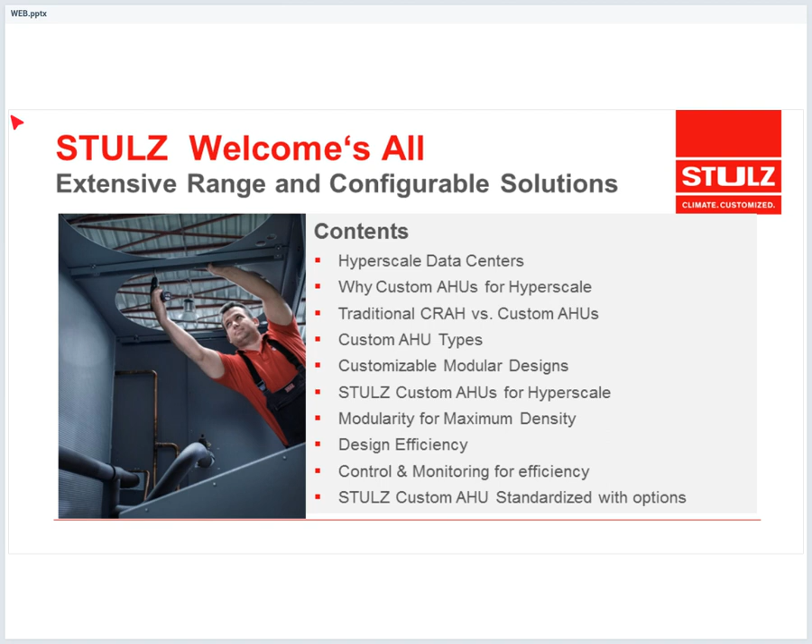So why hyperscale? What are the influencing factors? Because the demands are growing faster and faster, and the amount of data being provided and produced is growing in a hyperscale way. The requirements for reliability, flexibility, uptime, efficiency, and at the end, cost and available spaces are drivers for new ideas.

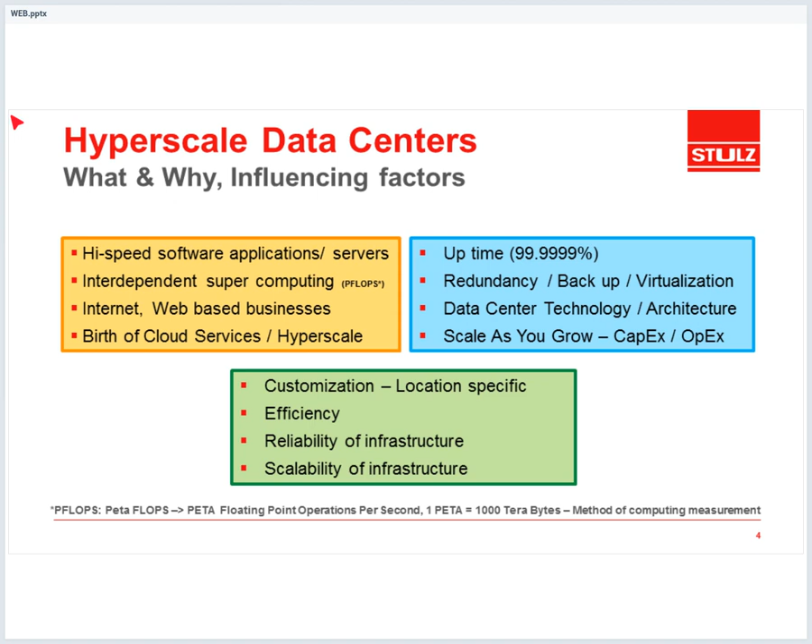In order to meet all these new requirements, it becomes instantly more difficult to find something off the shelf.

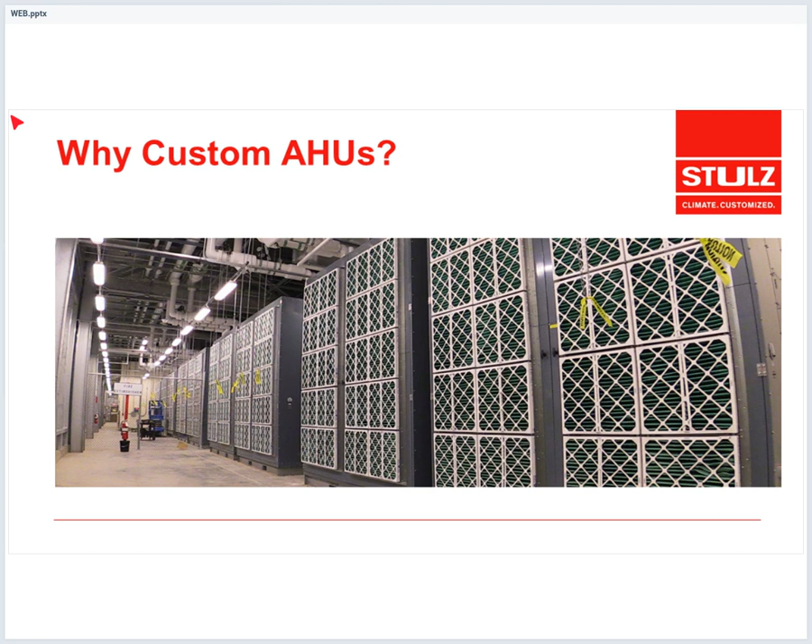Why custom solutions are needed and also makes a lot of sense.

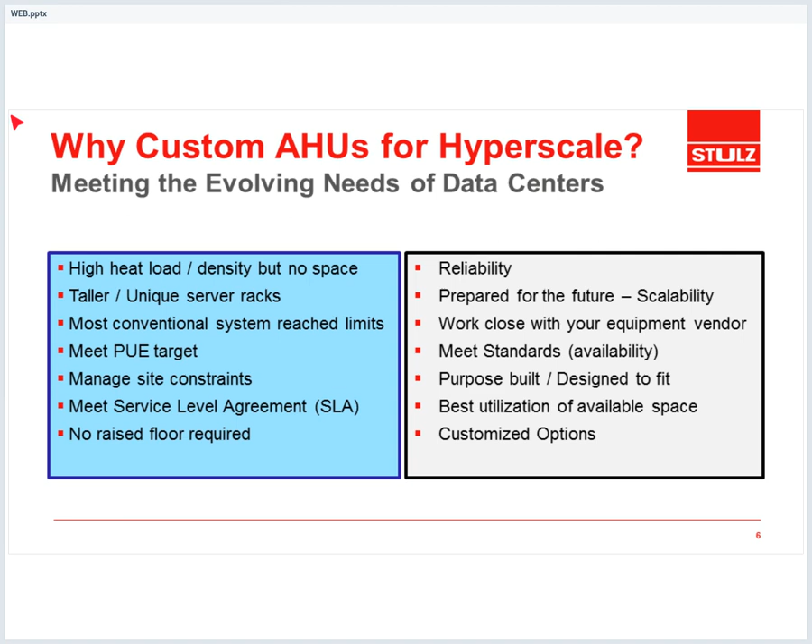So this illustration actually shows you how such a design, let's say using custom indoor air handling units with horizontal airflow pattern in a data center.

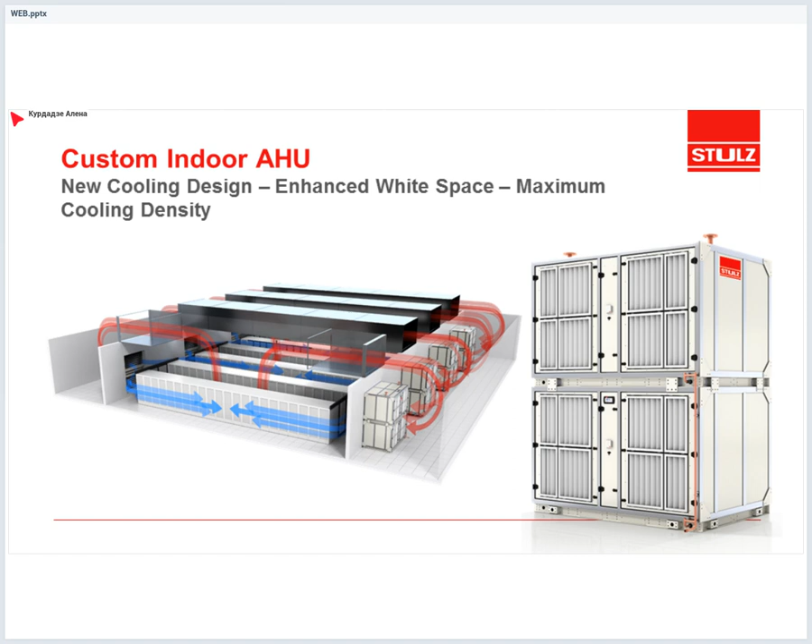With the new system of custom indoor AHUs, there is a new parameter born. So we call it cooling capacity per linear foot or meter.

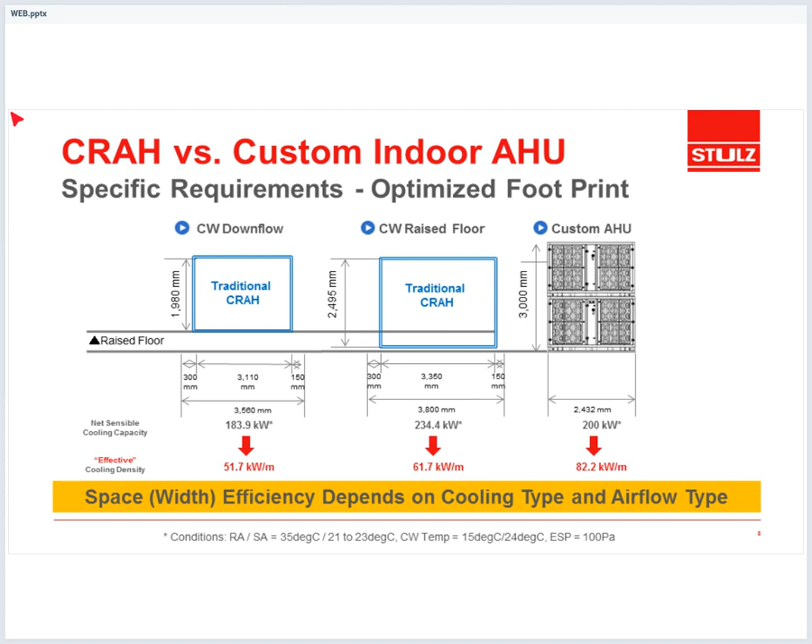So what is the impact on cost from CapEx as well as OpEx point of view?

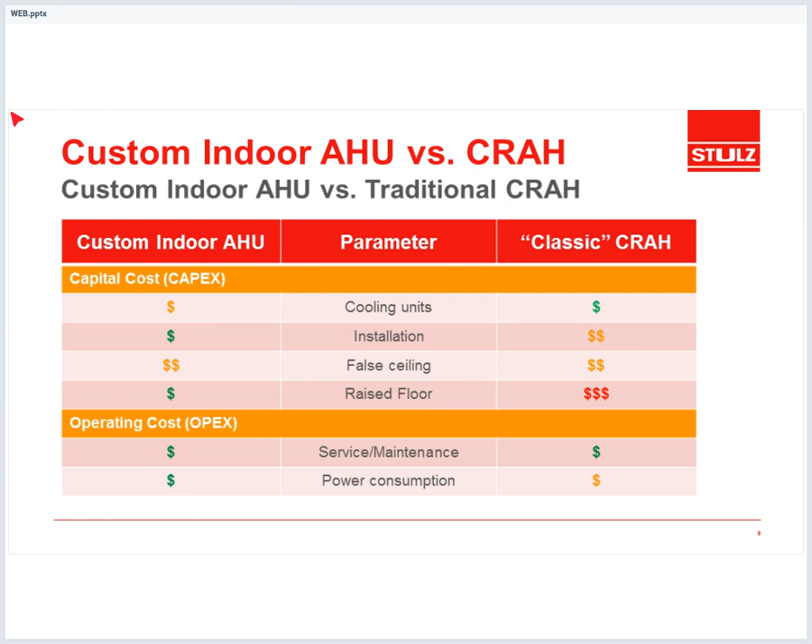So custom designs in general can be available in many different cooling configurations and shapes, from a simple chilled water over DX or combinations with free cooling or adiabatic, indirect adiabatic. Many different configurations are possible.

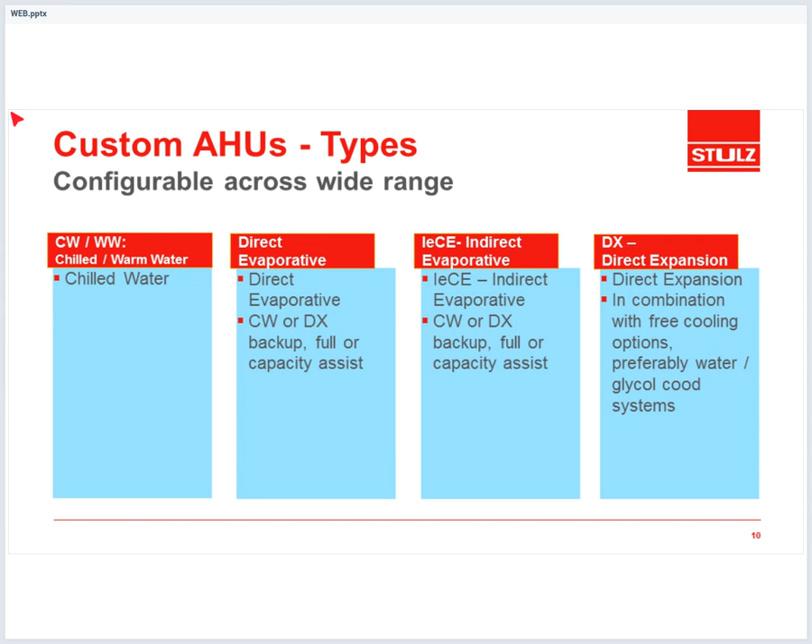So I have recognized over the last years, since I'm working with so many different clients and so many different projects, that each data center design is somehow unique. The building blocks can vary as per the user specifications and requirements for operation conditions, ambient and space. So it becomes at the end of the day a user-driven, a custom designed and a purpose built cooling solution if the best possible is wanted. We can offer today a significant range of field-proven design concepts and products with horizontal airflow patterns. From a stackable fan coil unit to a big AHU, nothing is left out.

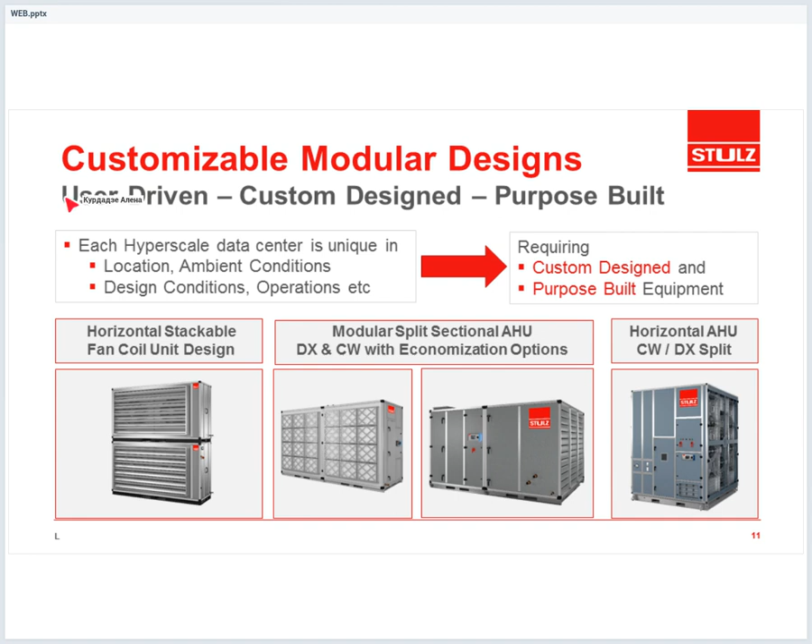So is there a way to standardize a custom solution?

Yes, maybe there is. When standardizing the entire data center design, this principle applies too. A standardized cooling solution has cost advantages and is generally available more quickly. In particular for smaller data centers, the use of a standard unit is probably the better choice.

What you see here is our standardized stackable fan wall design in building blocks of nominal 200 kilowatt and 400 kilowatt units or modules. We have 100% rear side access. It's easily deployable due to lifting provisions for fork and crane lifting.

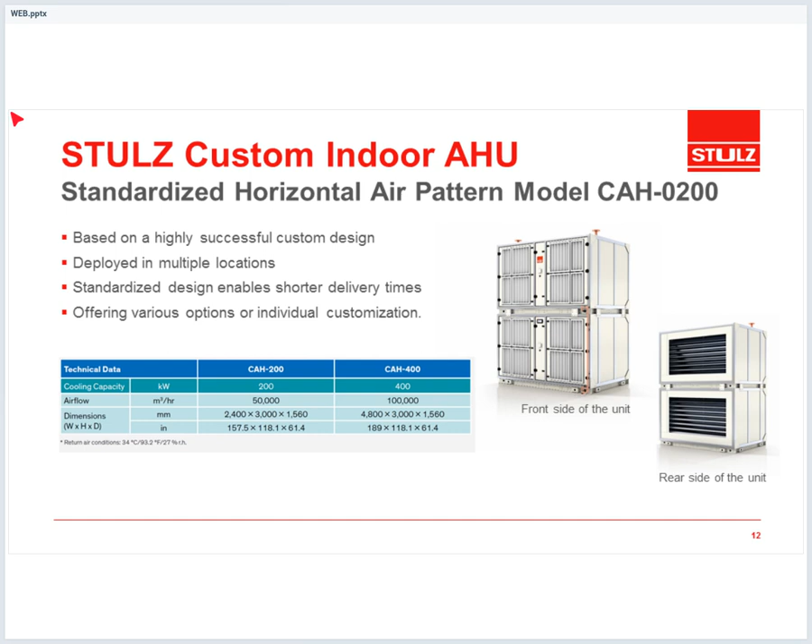Having this kind of design concept helps us, as we see on the next slide, to create a kind of cooling wall. So we have the possibility to install the units on site in the service corridor side by side, creating a wall of cooling and using the optimum out of the available space.

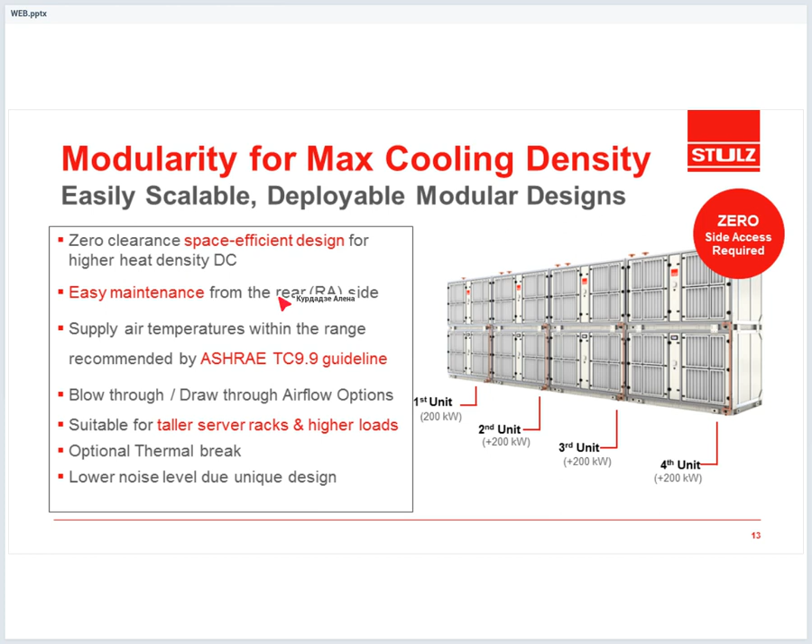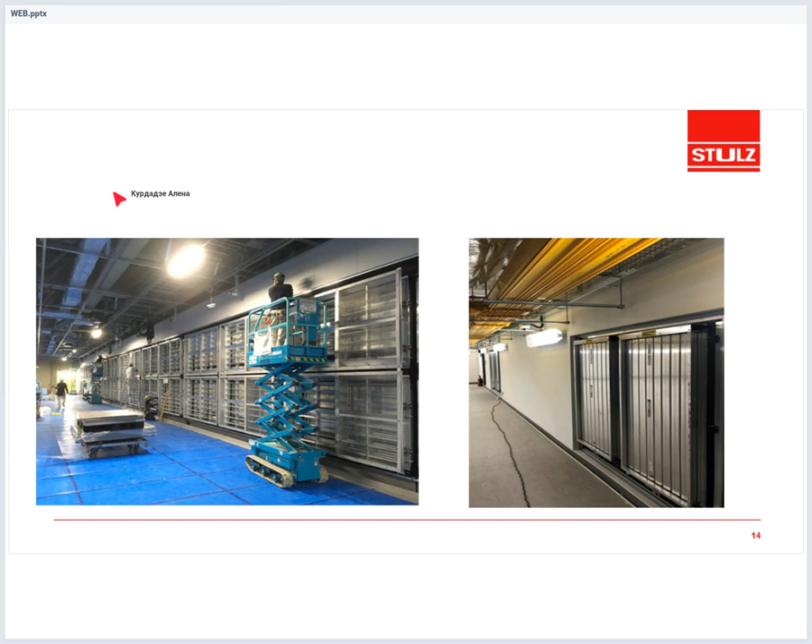So the wall of cooling is also a wall of efficiencies, provided by design features that allow for an even distribution of air, temperature, and pressure into the white space.

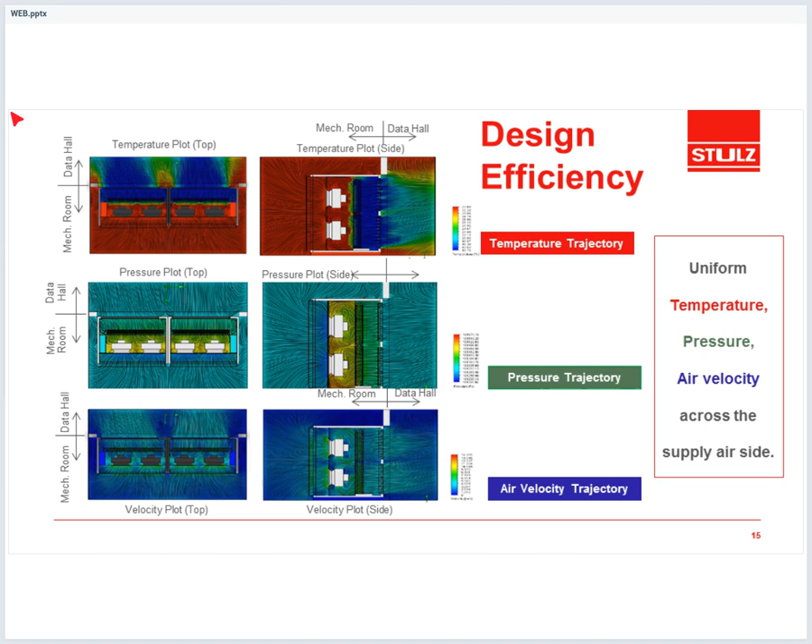So this slide, this illustration shows you a CFD that we have done for one of the data centers. We have finally also commissioned with our system. We had to do a CFD for our customer in order to show and prove to our client how our system will react in case of a failure scenario.

So you see that since all units within this room, all 12 units, work in a network. They're communicating, they work in a group. So if one of these units is off, the other remaining units will recognize the new scenario and will compensate by ramping up fan speed or opening valves, providing more water, more cooling, in order to compensate the loss of the faulty unit.

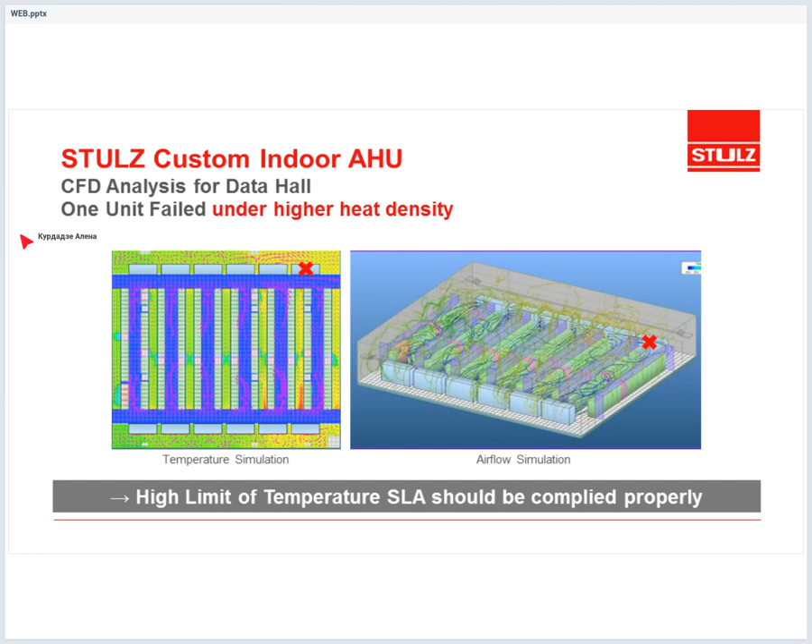So, coming to controls - controls is another feature that can make a big difference, a significant difference, and is very important to consider, especially when utilizing variable speed fans and other smart components like, for example, control valves with metering features. Along with connectivity, smart networking team-play modes enable further performance, reliability and efficiency gains, and can help find the sweet spot in group operation.

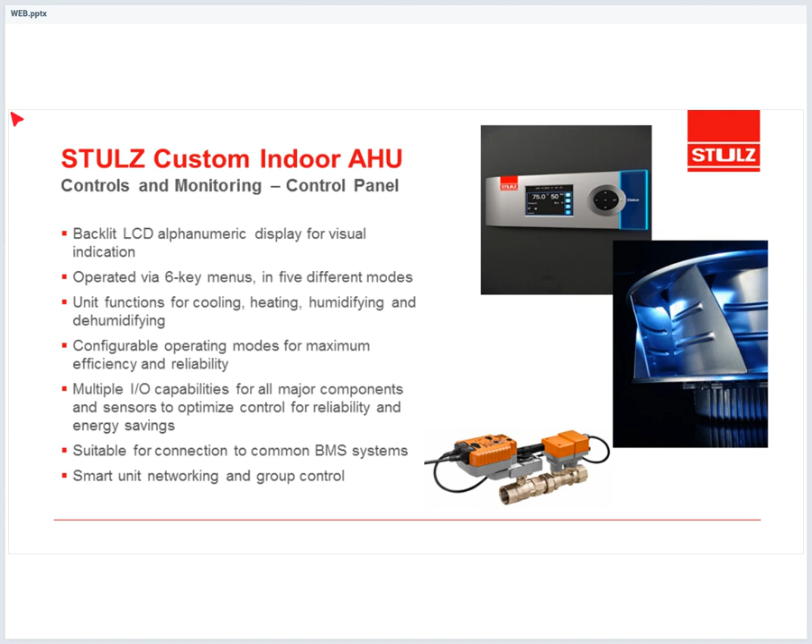So coming to something that has been designed in particular for the European market and will be produced only in our factory in Hamburg. Is our new concept, our new product range called CyberWall.

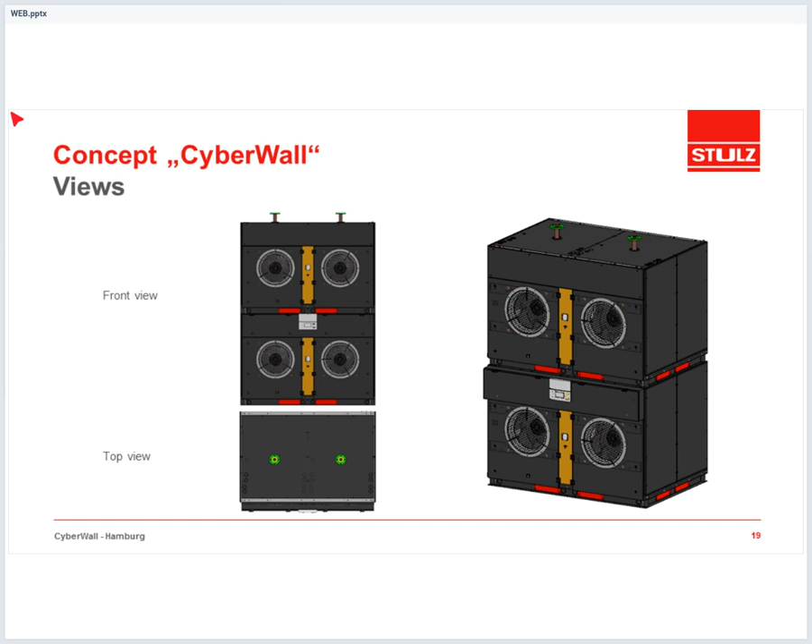And when you go on to the next slide, we have decided to offer two modules, two blocks. One block comes with 100 kilowatt of cooling, and the other block comes with 150 kilowatt of cooling. The footprint of both blocks is the same, so you can change according to the specification or to the cooling capacity that you need. You can variate the blocks, so you can use a 100 kilowatt block together with a 150 kilowatt block and get a 250 kilowatt unit, or you can combine two 150 kilowatt blocks and get a 300 kilowatt unit with a total height of 2 meters. So having two blocks, two cubes of cooling, you can create 5 different unit sizes and capacity sizes.

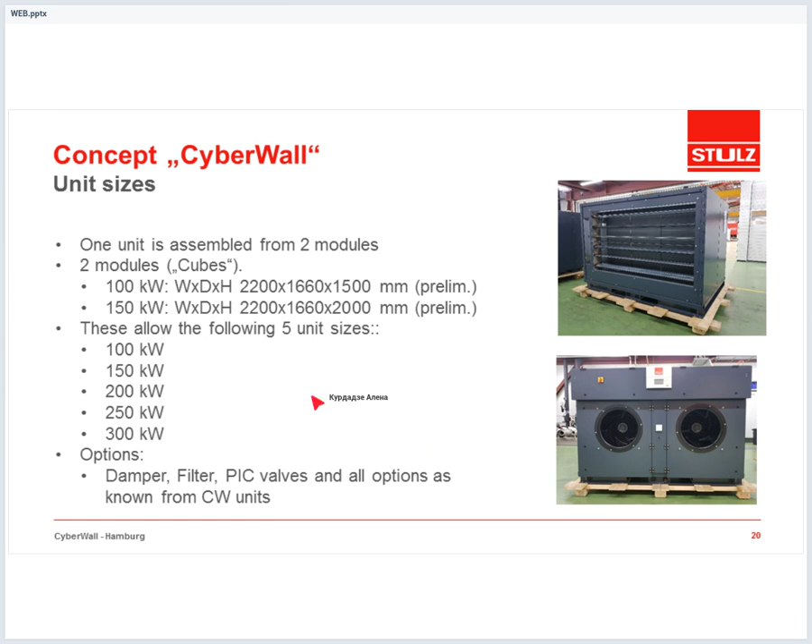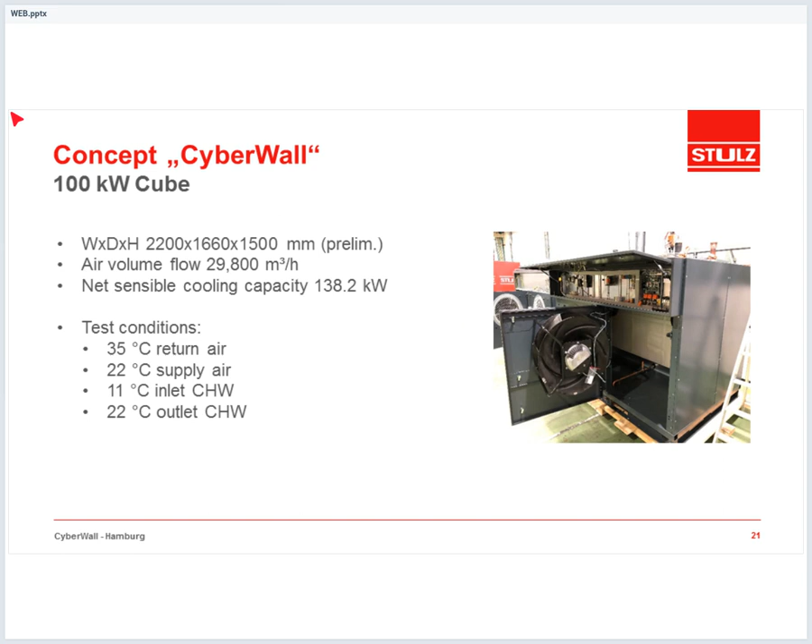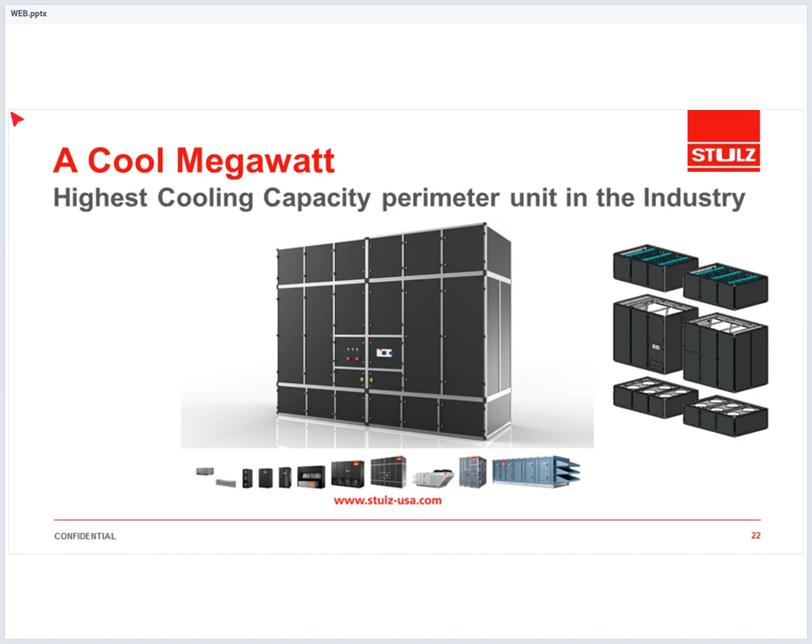So that was my presentation. Thank you for listening. If you have any questions, I think we are now able to answer.